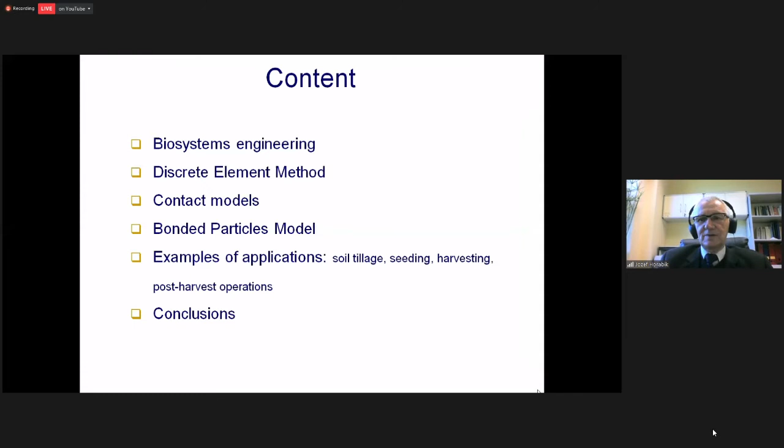Excuse me, Prof. Joseph. Yes. Are you still on the slide content? I'm on slide 16. Oh, I don't know. How about the other participants? Same with me on the slide. Prof. Joseph is still on the content. Please help. Yeah, still content. Okay. Maybe Prof. isn't in slideshow. Okay, I'm very sorry. So I will stop sharing this presentation and start from the beginning. Sorry again. Sorry, Prof. Thank you. Okay. Okay. What do you see right now? Slide number 16. Yes, Prof.

Okay. So on this slide, I'd like to show the effect of cohesion on particle behavior, presented by Tsuji et al. This slide indicates the strong impact of cohesion on soil particle behavior during the pushing process by a bulldozer blade.

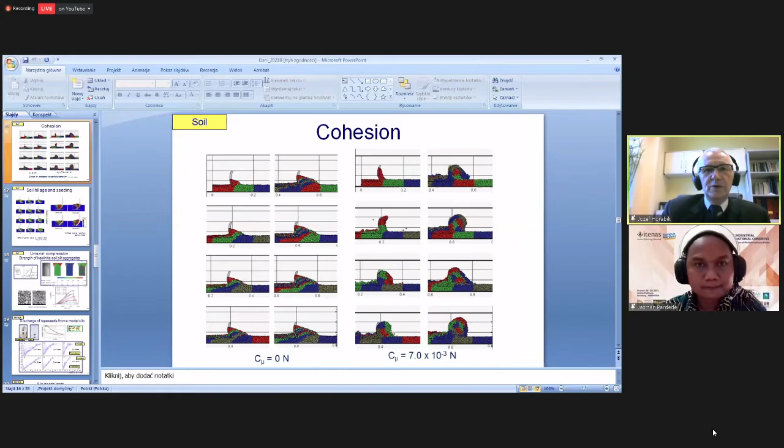Okay, I switch to slide number 17. Can you see slide number 17 right now? We saw slide 16. I'm sorry again. I don't know what is wrong with my computer. So, okay, I shifted to slide number 17 but I'm not sure. Do you see the proper slide or not?

But anyway, I'd like to shift to the problems of soil tillage. In case of soil tillage, the size of particles assumed in DEM simulation influences the quality of reproducing real processes. So smaller size, better approximation. We can see the images of simulation for small size particles and larger size particles. But smaller size means many more particles are needed for simulation. So it's very time consuming.

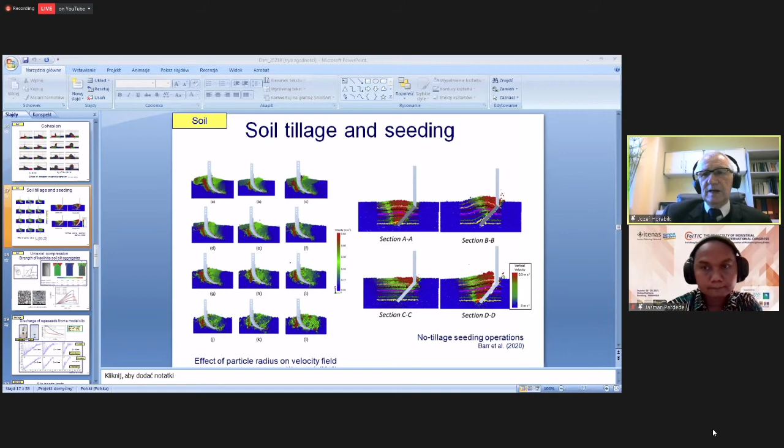Joseph, we now see only slide 17. Oh, I'm sorry. I don't know what is wrong with my presentation. I'm very sorry. So, well, I'm afraid that I cannot improve this. So, now is slide 28. 28. Yes. Okay, let me try again. Also slide 28. Okay. Okay.

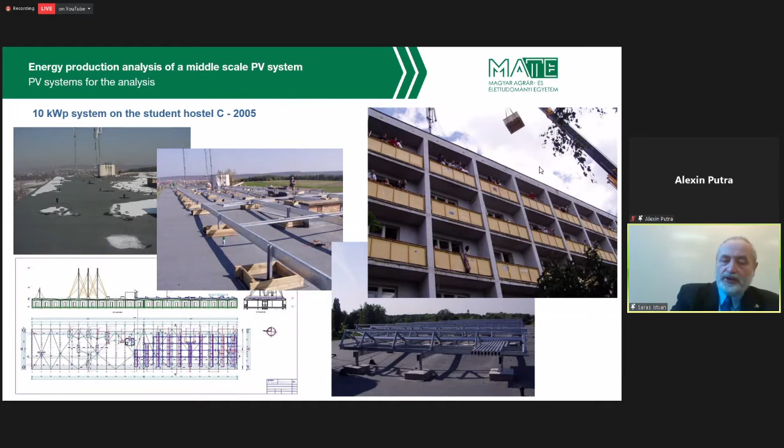Actually, what I mainly would like to show you is that we installed a 10 kilowatt peak photovoltaic system on the top of one of our student hostel buildings in 2005. Here are some pictures from the construction of the site, and here you can see some different data. At that time, this was the biggest Hungarian photovoltaic system. Of course, since then, the technology is improving very fast, as we could see from several presentations, how big the improvement is. We can see it in our university as well.

Now, altogether, we have 600 kilowatt peak installed on the roofs. And even in Hungary, we have some bigger constructions, mainly operated by professional companies. Even I have a small system in my house as well. So why was I choosing this old and relatively small system? Because we could collect a lot of consequences about its working, and perhaps this can be interesting regarding the aging, how the power is changing and what sort of factors we can see.

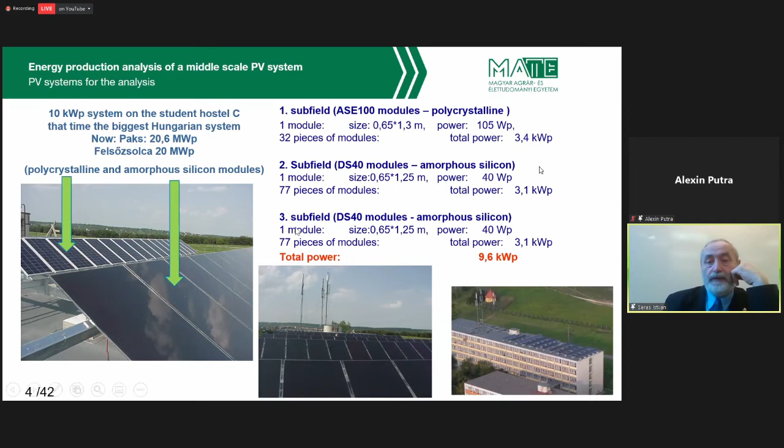First, let me show a few details about this system. Altogether, we have 150 square meters of modules. Most of them are Hungarian-made amorphous silicon Dunasolar modules, a company that is no longer working in Hungary, and a smaller fraction of the system is made of German polycrystalline modules. Here you can see some details about the size of the system, the numbers and the power.

I will give you a few words about the newer system, which is a semi-transparent module system in front of our Aula building. There the capacity is much less, 3.3 kilowatt peak. That is a demonstrational system, not really for energy production. Of course, we produce energy with it as well, but we wanted the students to meet this technology every day, because the other systems are on the rooftop, so they cannot meet with them.

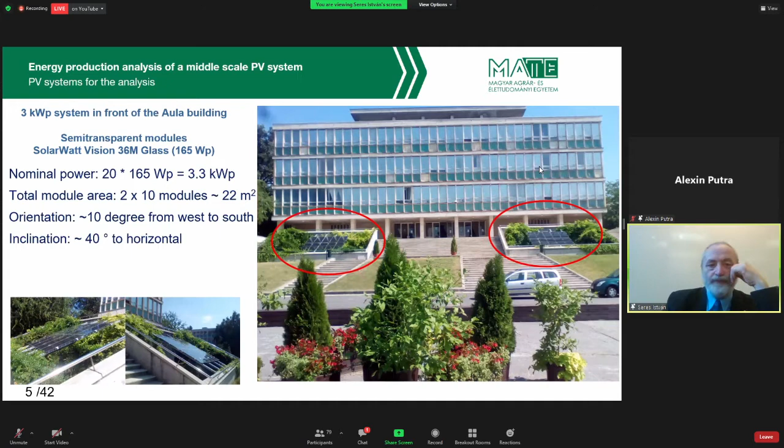And of course, in our research lab, we have different smaller modules and different testing sites to check the technology. Oh, sorry, I'm not sure whether you can see my whole figure or not. I hope so. So we did a lot of different measurements.

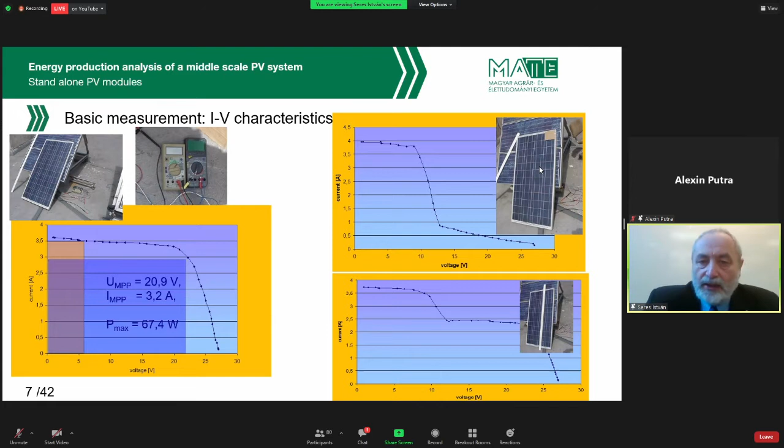Even in education, we have these measurements during the physics lectures, where the students have to measure the IV characteristics of the modules and calculate the maximum power that can be got from a given module, and we can even show them why it is important not to shade the modules, because if we shade just one cell, for example, then the module power comes down very drastically. So these figures are showing the effect of shading under different geometries. Of course, all these types of modules had just one bypass diode. In the newer ones, more diodes are installed, and it can decrease this effect.

On the other hand, we made a comparison of the different systems, different technologies as well. For example, as I showed you, in this system we have polycrystalline and amorph silicon modules as well. Of course, the direct comparison of the energy production is not the best because they have different nominal power.

So what we did, we defined a so-called specific power, which is the actual power of the system divided by the nominal. So we watched with what power 1 kilowatt peak of module capacity is working, or how much energy is produced by 1 kilowatt peak of modules. So the energy production was divided by the nominal power of the system. In this way, we got specific power and specific energy production, and we checked the rate of these productions.

That means that the energy of 1 kilowatt peak of polycrystalline was divided by the energy production of 1 kilowatt peak of amorph silicon. And what we could see, this is data of long years, is that there is a seasonal effect in this function.

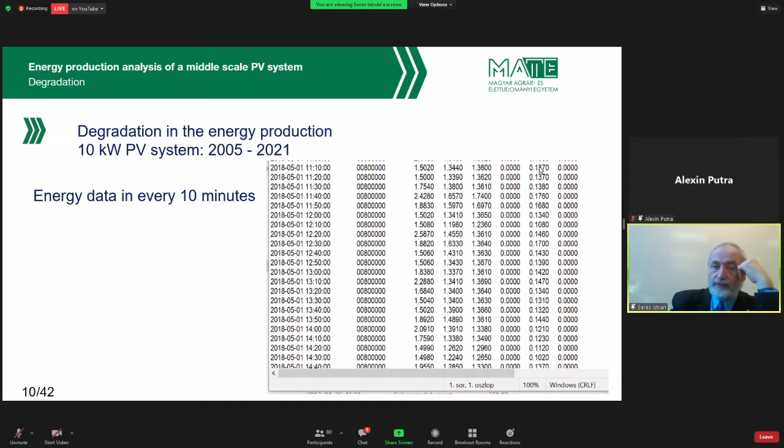So from this data, we can calculate a 10 minute average power for each subsystem. Of course, we try to check how much degradation there is in the system. This degradation is normal, I think.

If you buy a photovoltaic system, for example, I installed one, as I mentioned, on the roof of our house last year, and the warranty was that these modules will have 85% of their initial capacity or nominal power after 20 years. How can we check it? Okay, we checked it in our system.

So as you see, we did some measurements and made some yearly analysis of the data, how much energy was produced from year to year. At the beginning, it was very regular. I mean, at the end of every year, I was coming here. In later times, it was not so regular, but it was working continuously.

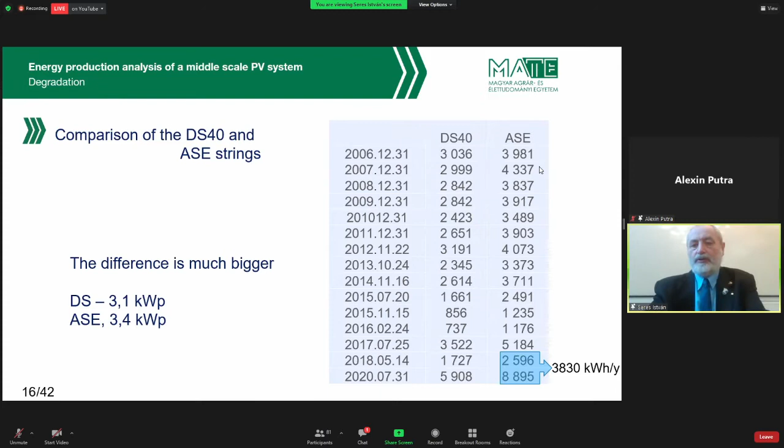I'll just show it in a different slide. In this slide, you can see what is the rate of the polycrystalline technology in the total energy production. What we can see is that it is going from about 40% to 43-point-something percent.

So our conclusion was that the amorphous silicon technology degraded more than the other modules.

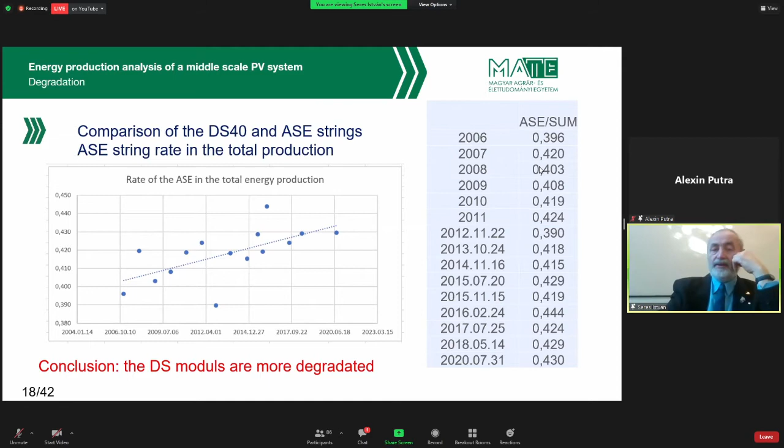Yeah, of course, each of them was degraded in a given scale. What can be the reason for it? So we are checking regularly the system, and these are the ASE, the polycrystalline modules. And on that way, when we checked the system, there was no sign of degradation. So visually, we could see nothing.

Of course, what you cannot see by eye is the effect of the UV radiation. Ultraviolet radiation is damaging the material somehow, but you cannot see it. So I think the polycrystalline modules are okay. What we could see is that during construction, they did not use rust-free screws. That was the only problem we should repair, but it does not have an effect on the working of the system.

After that, we were checking the amorphous silicon technology as well. We could not see colorization. The junction seems to be okay. There are no hotspots on the system. But what we could see is that, I think because of the production technology, in the bottom and the top of the modules, some air was going in. I think the insulation material is not the best. So between the module surface and the glass cover, there are some air bubbles.

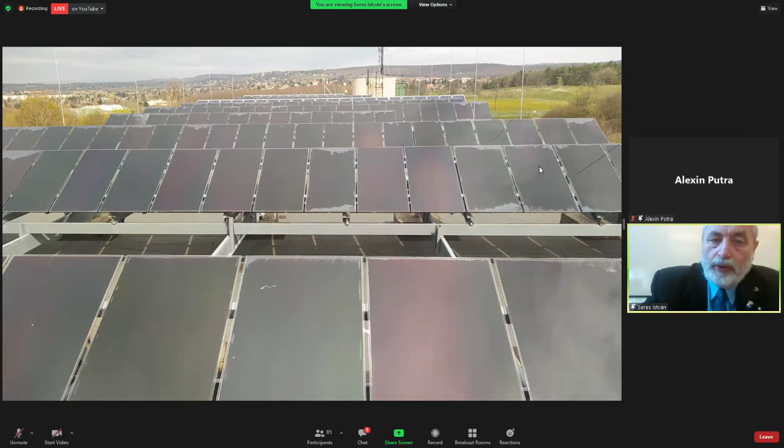In some cases we could see this effect almost in all rows, and in other cases it was a very partial effect. This is a photo of the system from before, and you can see that in the middle of the field, very few modules are affected, mainly in the sides, generally the sides of the system, and in the back part of the system. I made an analysis. This is the last row - in the last row, almost every module is affected. But if I go further, just the side modules are affected.

We were thinking about these numbers - this is the south direction, and this is the north. In the rows, the north part is affected in high range, and the rows in the south side of the field are affected less. And even in these rows, mainly the side modules, which are in the edge of the rows, are affected. So we were talking about what can be the reason for this, and we concluded that probably...

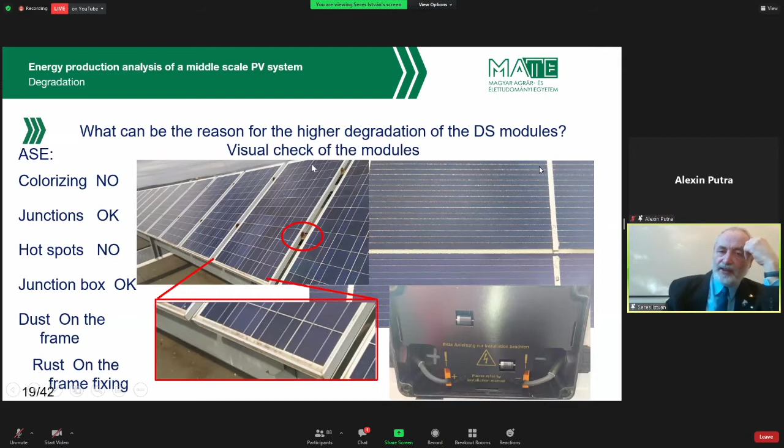Probably the wind direction in Hungary, and in Gödöllő as well - the main wind direction is from the north - and as the wind is coming, in some cases we have quite strong wind. These Dunasolar modules, the fixation point is somewhere here. And of course, if the wind is coming and some turbulence develops, then it is moving continuously, I think, the sides of the modules. This problem does not come for the polycrystalline, because the polycrystalline has a frame, and this frame does not let the module itself move, but it's not the case for the amorphous silicon.

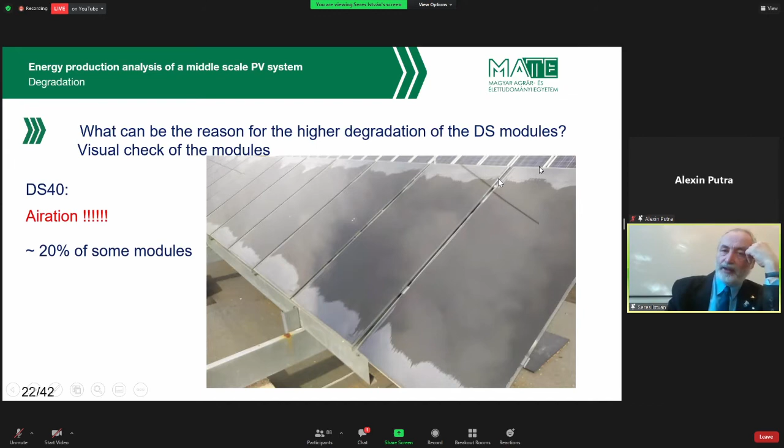So the fixation points - there are 4 to 6 fixation points somewhere here. You can see the holder rod behind, and this is the glass. If the wind is coming, it can move a little bit slightly. Of course, you cannot see it by eye, but I think it can move, and that is the reason why the side modules and the backside modules, from where the wind is coming, are mainly affected by this problem. So we predicted that this causes about 4% of energy loss continuously at this moment. Perhaps we should try to re-insulate some modules to see if it stops, or whether we can stop it or not - that is the next question.

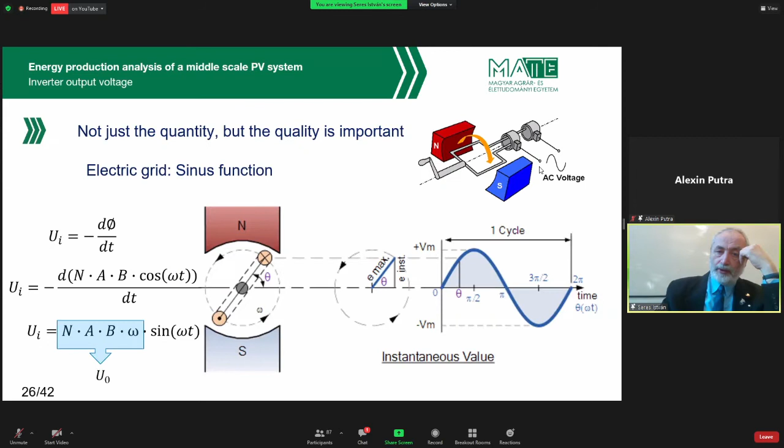We made with students a very simple measurement circuit. To measure this sine function is not so easy because it is changing very fast. You cannot check it with a multimeter.

If you measure with an oscilloscope, you can visualize it very easily, and even with newer oscilloscopes you can save the data as well. But these types of oscilloscopes are not so cheap.

So with students, we were using high sample rate voltage measurement with data loggers. But the problem is that these data loggers can generally accept a maximum of 5 or 10 volts as input voltage.

So we were setting up a voltage divider with two resistances connected in series. From physics, you know that in resistances, the voltages are proportional to the resistances in case of a serial connection.

We took this unit, connecting the grid voltage to the serial connection of these two resistances, and we measured just the voltage of R2. Using 46 kilo-ohm and 0.46 kilo-ohm, high resistances had to be used to avoid high currents, giving roughly a 1 to 100 ratio.

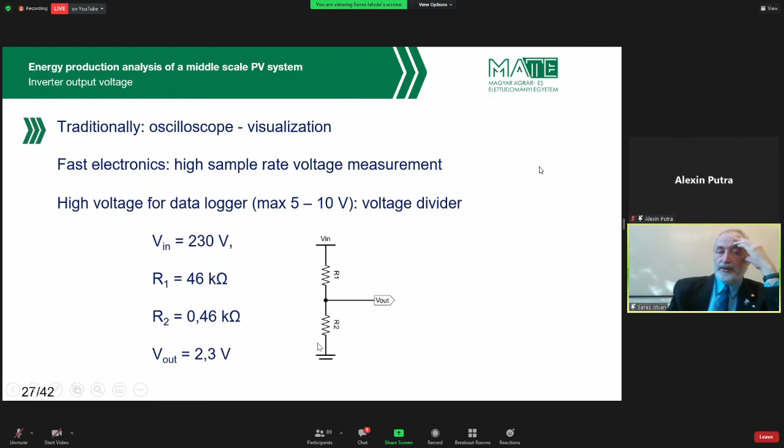Then the power rate or the voltage rate is 1 to 100 as well. In this way, we could measure the voltage as a time function.

We were using two types of units for this purpose. This is a National Instruments USB, a very simple one which can measure at 48 kilosamples per second. And we were using a National Instruments MyDAQ unit, an educational unit with a sampling frequency of 400,000 samples per second.

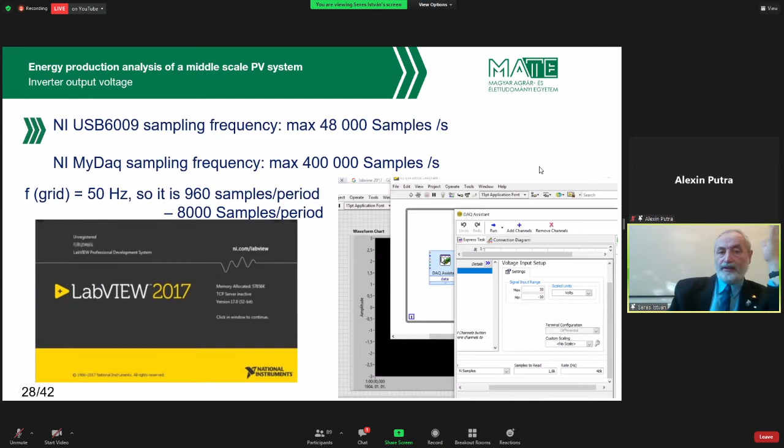With these units, we used the LabVIEW software for collecting the data, and with this we could measure the time series of the voltage. This is the measurement of the voltage of the grid in the physics lab.

With this setup, we could check the shape of the voltage function for different inverters producing solar energy. For example, this is a very simple inverter.

We have a so-called solar suitcase. In this solar suitcase, we installed a few small PV modules, about 5 watts altogether, along with a charger and an inverter. This unit is borrowed by the scouts, and when they go to camp, they can charge their phones and operate an LED for lighting and so on.

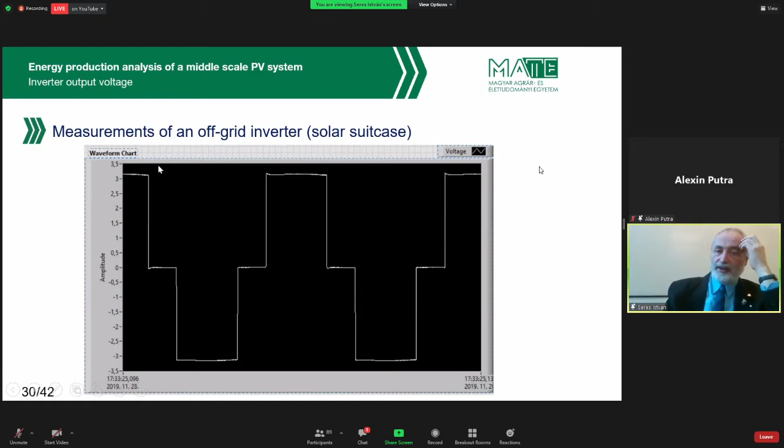We checked the simple inverters. These simple inverters are generally not sinusoidal, but normal units, chargers and lamps, are designed to work with them.

But the problem is, I just need to check how much time I have. Perhaps I can stop for a while now, because I would like to show you something. Theoretically...

This is an audio software. With this audio software, I would like to demonstrate for you what we measured. Actually, oh, I made a mistake. No problem, I can open it again. So I'll just play a sound for you. I hope you will hear it.

Could you give back any feedback? Could you hear the sound?

No, no, no. We cannot hear. Oh,

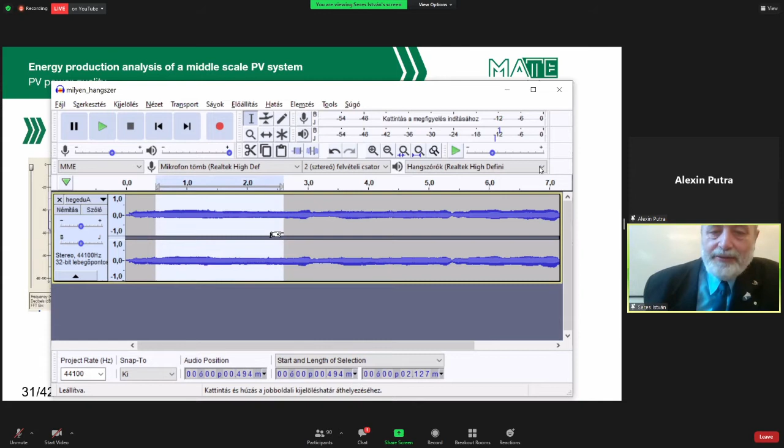it's really a shame. Okay, then this demonstration will just work by picture. Sorry for it. The problem is that I cannot get the sound. So this is a sound of a violin. I'm really sorry that I could not demonstrate it, but I don't know how I should set my computer to be able to hear the sound of the violin as well.

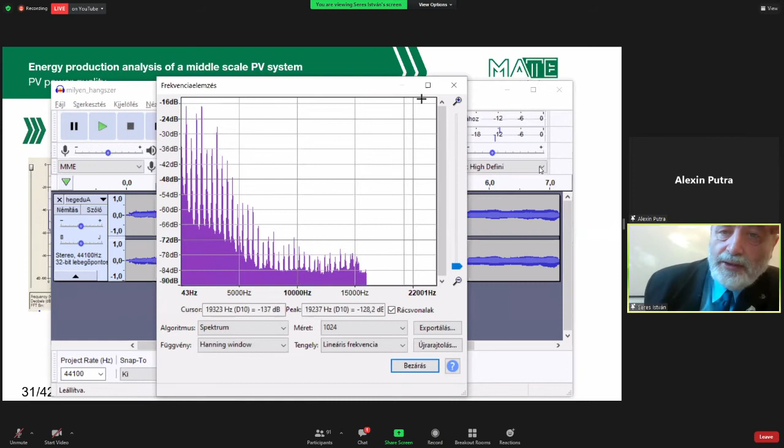It was recorded and we can analyze it. Because the main question: if we hear a violin or a piano, we can decide which instrument's sound we hear, although they are playing theoretically the same sound. For example, this sound A, 440 hertz. With this software, I can show you the spectra. The spectra shows what sort of frequencies were used. This is the spectra of the violin.

I have 4 children, so they play different instruments.

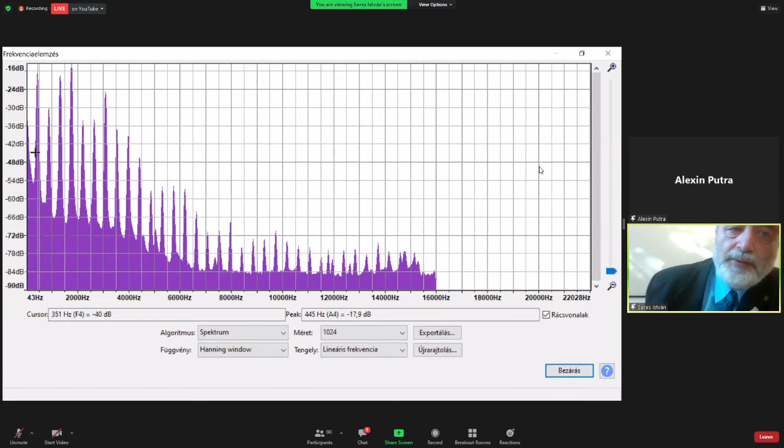At this moment, we can see that this was about 440 hertz. This is the peak, but we have 880 and we have 1320 and so on. So when we hear a sound, we hear the basic frequency, and we have the double, 3 times bigger, 4 times bigger, and so on frequencies as well.

If I open another instrument, this other instrument is a piano. Surely you would be able to hear it, but at this moment perhaps it's useless to play. And if I check the spectra, we can see a very different range, but the same basic frequency, 440, and we have so-called harmonics. So harmonics are generated as well when we hear a sound.

And as the rates of the harmonics are different, we can distinguish which was the piano and which was the violin. So in this way, we can recognize what sort of instrument was playing. Okay, this was about the sound. Now I'm coming back to my presentation.

No, I don't want to say. So this is a spectra of the piano, and this is the spectra of a violin with a different software. So what is the difference? The difference is the power rate of the harmonics. But these harmonics exist for any system when we are generating periodic functions.

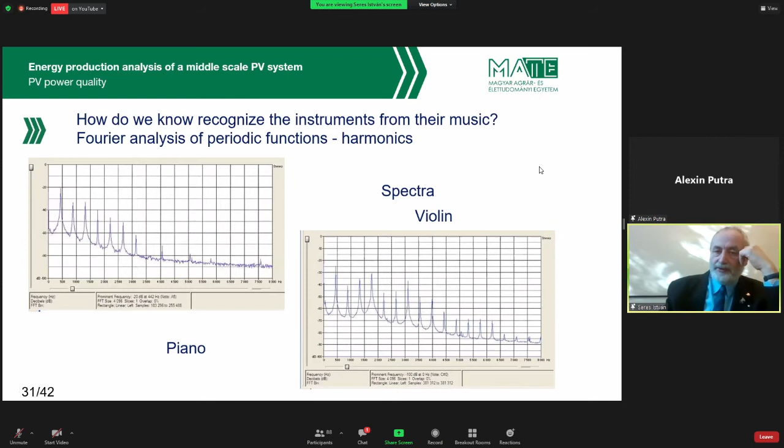Perhaps some of you were learning mathematics and have learned Fourier analysis theory. Fourier analysis says that any periodic function can be reproduced by a special sum of sine and cosine functions. This is the so-called Fourier series. And we even have the rule for how the multipliers of the sine and cosine functions have to be calculated.

And what we see is that in this case, I have to multiply x by whole numbers. If x is a given frequency, then I have the multiples of x. So I have the harmonics. In this way, we can set up the spectra of any periodic function. In some cases, we have even functions. We call a function even when it is symmetrical to the y-axis, and odd when it is symmetrical to the origin. The sine function is odd and cosine is even.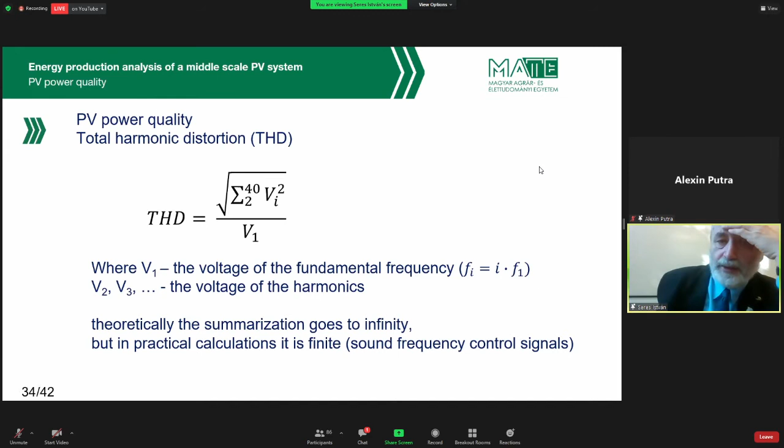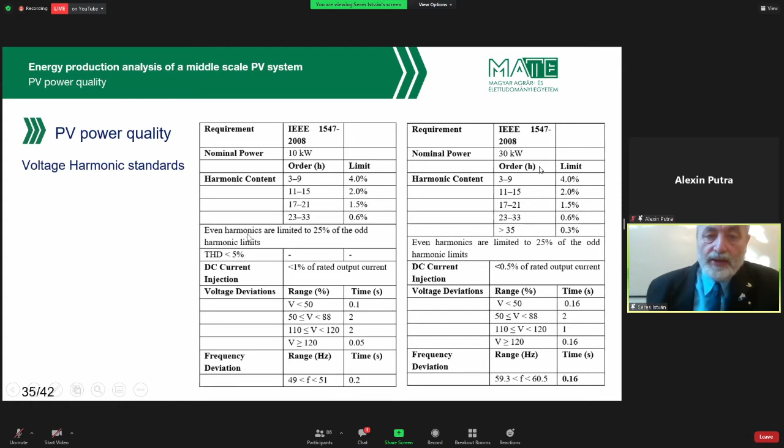Theoretically, the summation goes to infinity, but the amplitudes of these voltage functions generally decrease exponentially, so after a while we can eliminate them. A few words about this analysis. First of all, there are standards, European and American standards, for how much harmonic content there can be in the lower orders and in the higher orders. And as you see, the odd components and the even components are different. I mean the limits.

If we check the different standards, generally they say that the total harmonic distortion has to be below 5%. Why? It's not interesting if it's odd or even, because this is the basic frequency. This is the first harmonic. If you check the first harmonic, the frequency is double, so the wavelength is half of the original basic fundamental function.

But in this case, the harmonic gives a positive and a negative addition in one part, so they more or less equalize each other. But if we check the second harmonic, in this 1/2 period, I have 2 positive and 1 negative range. And on the other side, I have 2 negative and 1 positive range. That is the reason why these harmonics are more strictly reduced than the other ones.

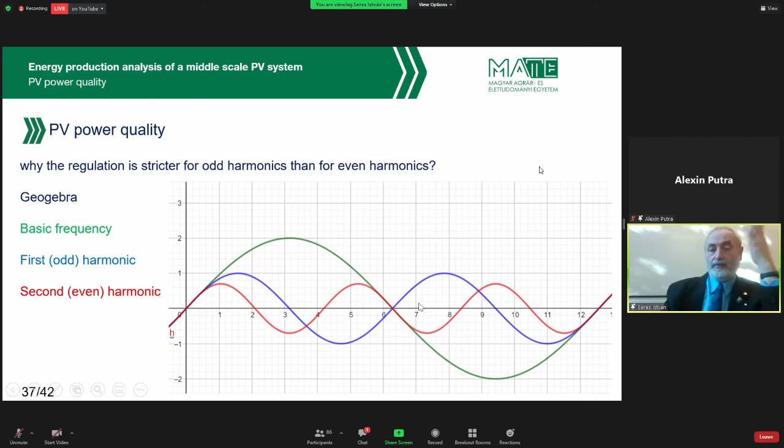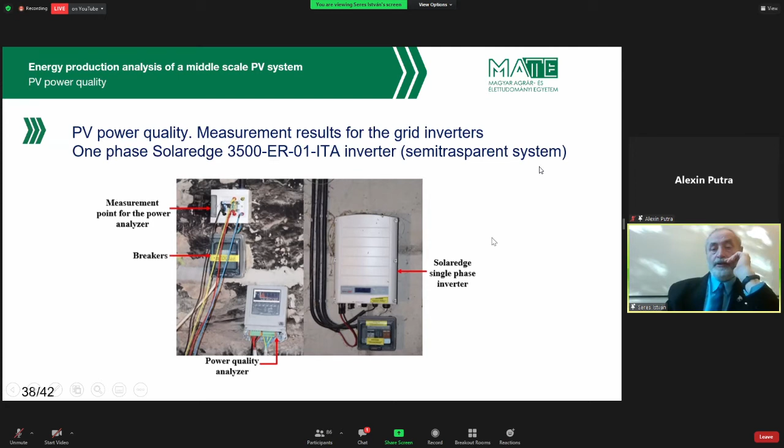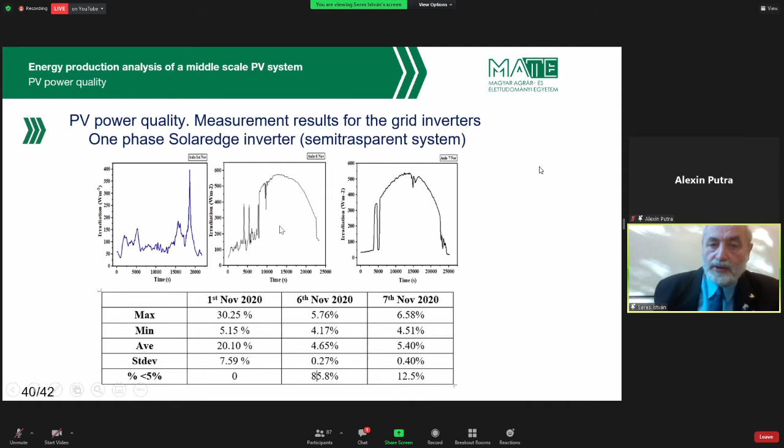Yeah, this is the inverter and the measuring of the semitransparent system. We did a lot of different measurements, and here you can see the harmonic distribution and the total harmonic distortion of the system for the voltage and for the current. What we could recognize is that under bad radiation conditions, the total harmonic distortion was higher, and under good conditions, the total harmonic distortion was in the limit. And we could measure the same for the big 10 kilowatt peak system as well.

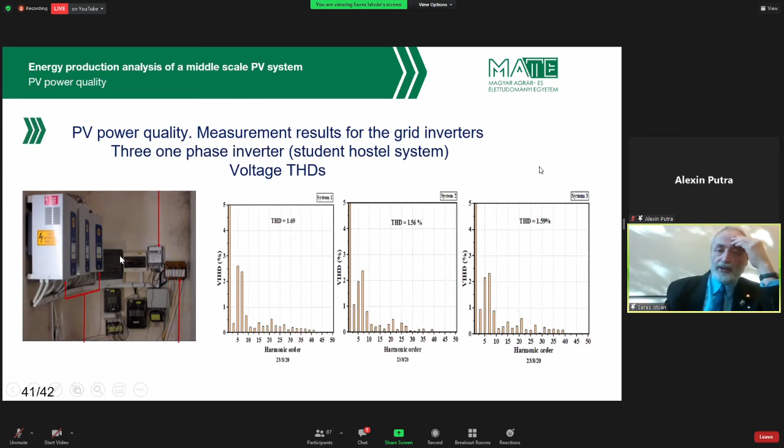So we could say that the total harmonic distortion is below the expectations when the sun is shining well, but it can go wrong for our inverters. Of course, it's depending on the inverters under bad conditions. But if the condition is not so good, the radiation is changing, or the radiation is very low, then of course we feed a very small amount of energy to the grid, so we cannot harm the grid too much.

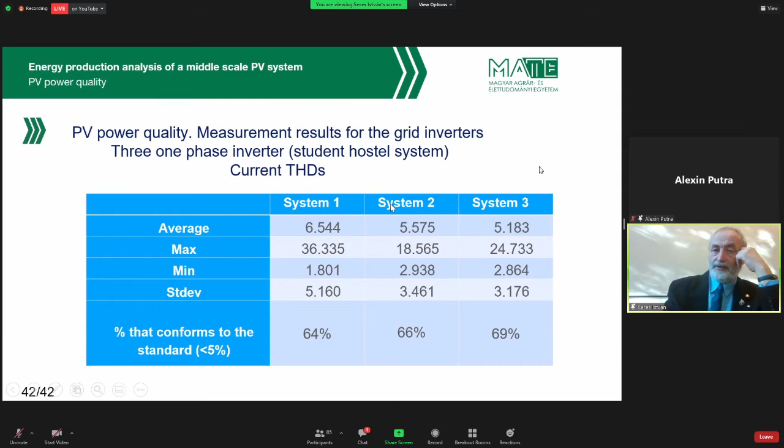But under good conditions, when the energy surplus is big, the total harmonic distortion is okay. That means that our systems do not harm the grid. So the grid operators don't have to be worried about it.

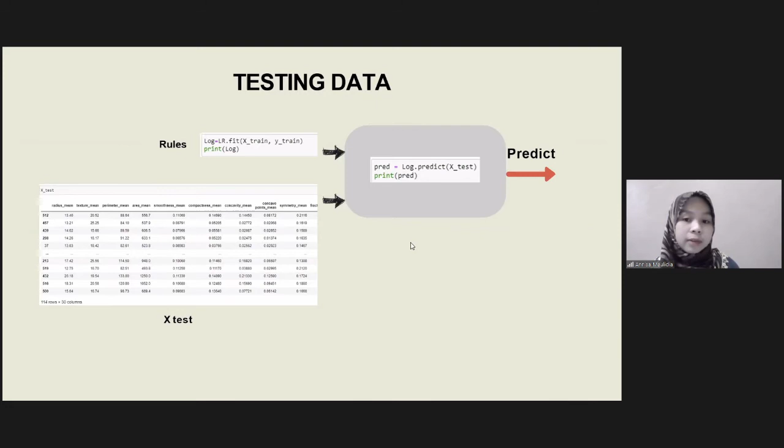And then it is processed with the function, and the output of the testing phase is prediction or classification of the type of cancer, which is evaluated through 3 methods: cross-validation, confusion matrix, and ROC-AUC. And this is the result of this paper. The slide shows the accuracy result in the training process and the accuracy resulting from the cross-validation process.

By using the same data, it can be analyzed that the training process is overfitting, one sign of which is the accuracy of the training data being greater than the accuracy of the cross-validation process. We can see that training data accuracy is 99% and cross-validation accuracy is 98%.

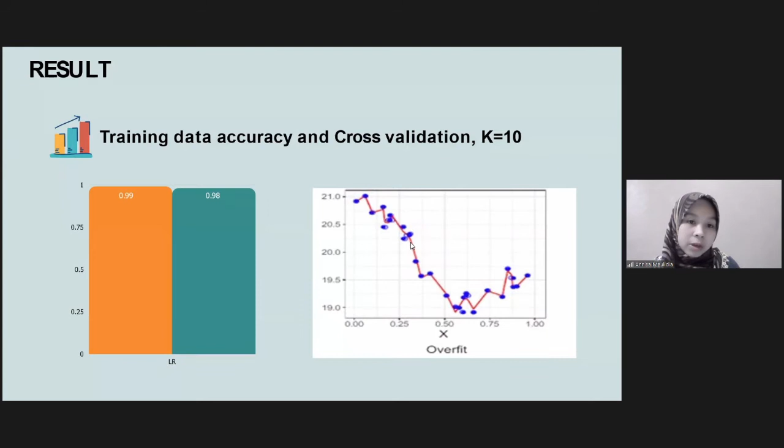And the next parameter is ROC-AUC. The value of ROC-AUC is 0.963, which is included in the excellent category, where the algorithm can predict 1 and 0 very well.

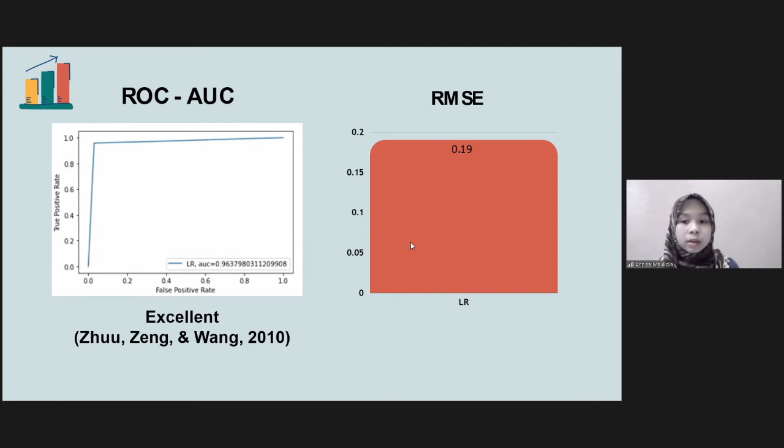And this is the summary of the overall parameter values in this study. Based on the research that has been done, logistic regression has a very good ability to predict the type of breast cancer, which is indicated by the test data accuracy value of 96.5%, and can generalize to new data formation by 98%.

In addition, the ability of logistic regression in providing information according to the requested data, precision, is also very good, about 95.7%, with the ability to find information, or recall, of 95.6%, which makes logistic regression able to separate predictive data as 1 and 0 by 96.3%, and with an error value of 0.19.

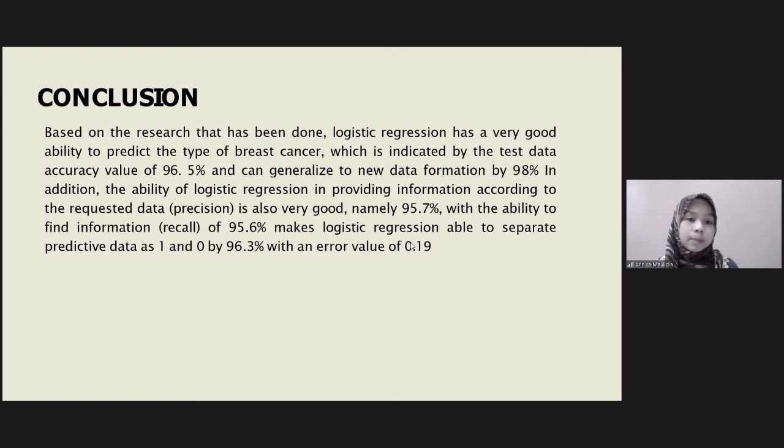And these are several references that I use in this paper. That's all for me. Thank you.

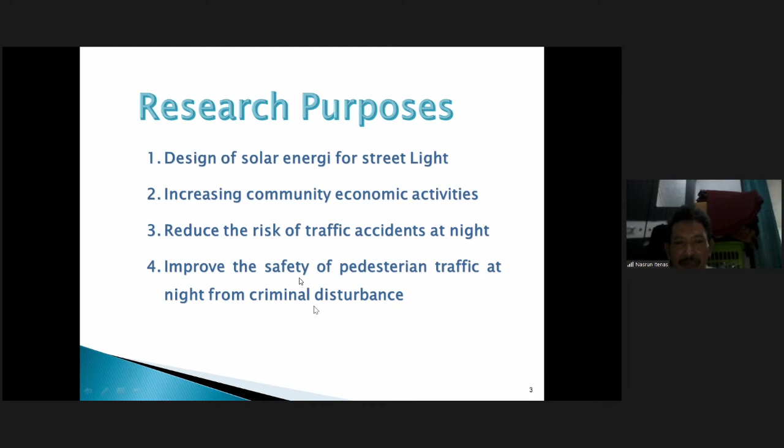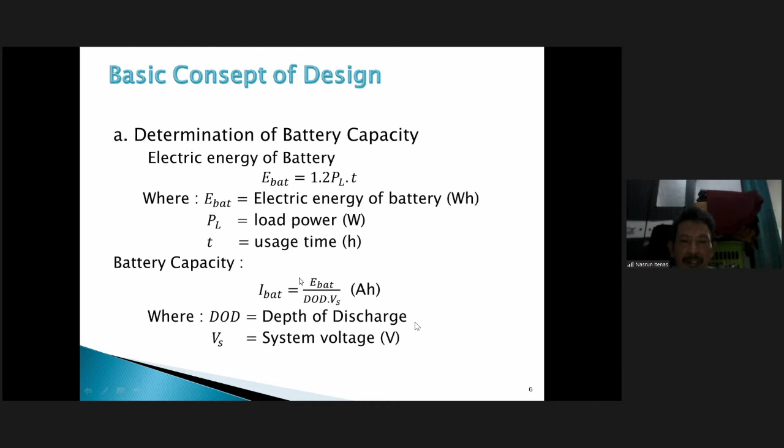To determine the panel capacity, we have the sun index from Mataram, Indonesia, Solar energy and surface meteorology, from the internet, climate and environment data from NASA. From the index we have the highest index, 6.23. The capacity of the solar panel we can calculate from the battery and insolation. This is the sun index.

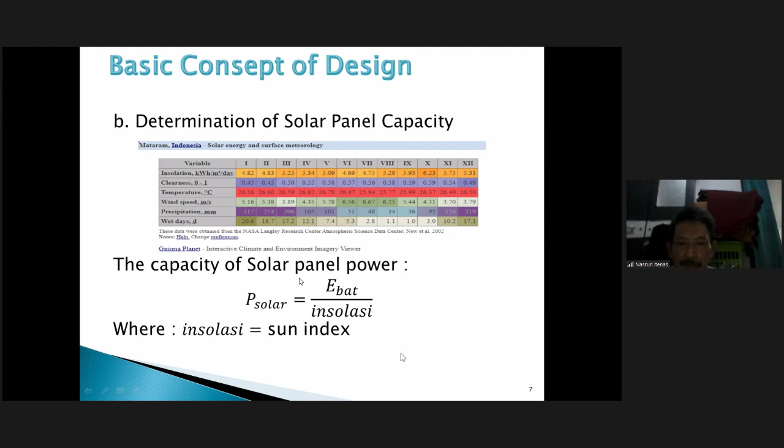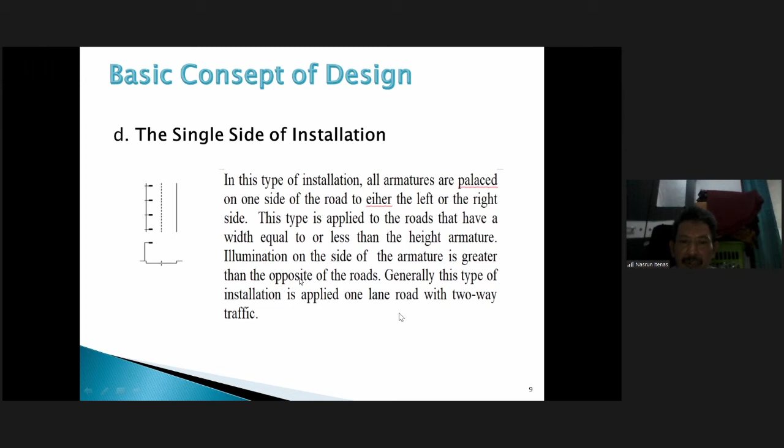The staggered installation, or zigzag. In the staggered installation, the armature is positioned on both sides, with the poles parallel, left side and right side. This type is applied where the width of the road is 1 to 1.5 times the height of the armature.

Opposite installation. In this type of installation, the armatures are located opposite one another and parallel to each other. Generally, it is applied where the width is greater than 1.5 times its armature height. Opposite installation is applied for two-way traffic on one road.

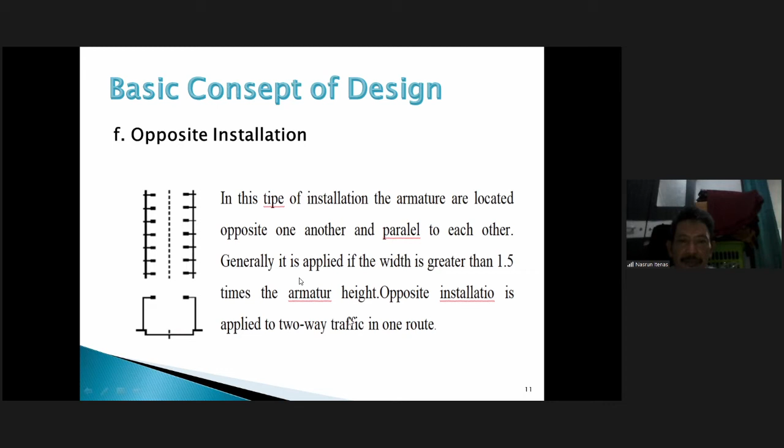The twin central installation is the central installation. The armature is applied on the median of the road. However, the installation can also be considered a single side installation for each road. Generally this installation is applied for dual carriageway.

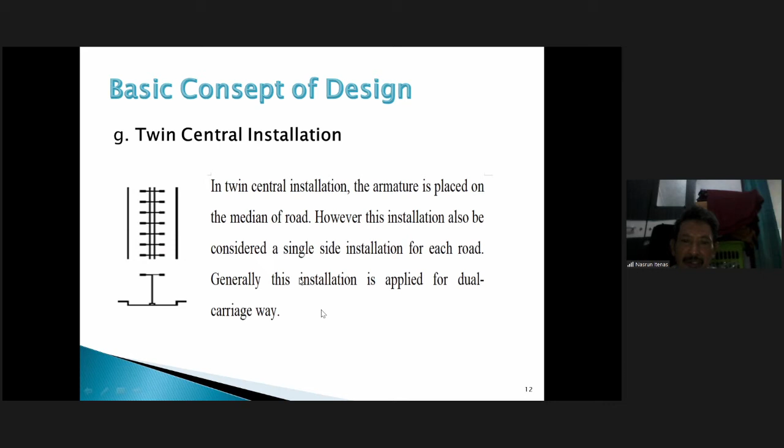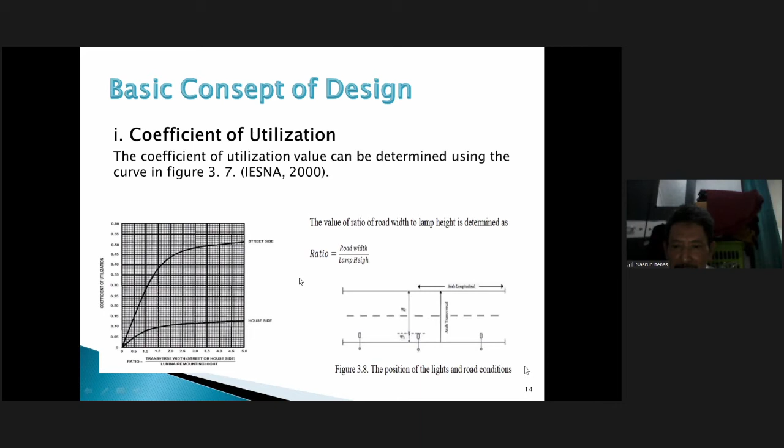The distance of the house side is set with W1 as OH, where OH is the overhang. The distance of the street side is W2 equals W minus OH. W1 is the distance of the house side in meters, and W the width of the road in meters.

The house side ratio is W1 per H, where W1 is the distance of the house side and H the lamp height. The street side ratio is W2 per H, where W2 is the distance of the street side and H the lamp height.

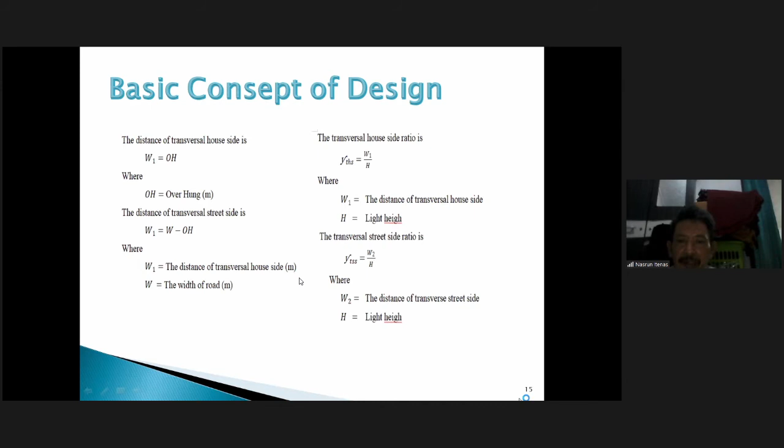After obtaining the house side ratio, refer to the utilization coefficient of house side curve. We can determine the value of the coefficient of utilization of house side, CUHS, and after obtaining the street side ratio, refer to the utilization coefficient of street side curve. You can determine the value of the coefficient of utilization of street side, CUSS.

Coefficient of utilization is defined as CU equal USS plus UHS, street side and house side, where USS is the utilization coefficient of street side and UHS the utilization coefficient of house side.

The space between two poles: the calculation is S equals F times CU times MF over W times E, where S is the space between two poles, F the lamp flux in lumen, CU the coefficient of utilization, MF the maintenance factor, W the width of the road, and E the illumination. The number of poles needed for a road is given by N equals L over S plus 1, where N is the number of poles, L the road length, and S the space between two poles.

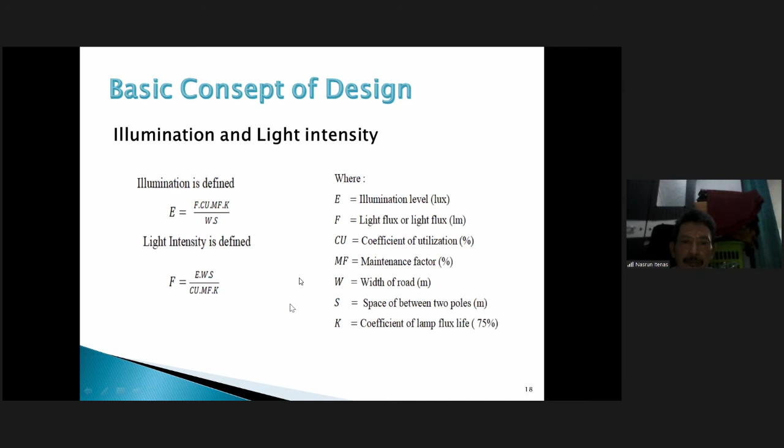The data, width of road, data analysis. Width of road W is 4 meters. The height of luminaire is 7 meters. Analysis: arrangement of public street lighting. The average road width is 4 and the height is 7 meters. The width of the road is lower than the height of the luminaire, so we chose single side for the public street. This was wrong, it is 4 meters. Sorry.

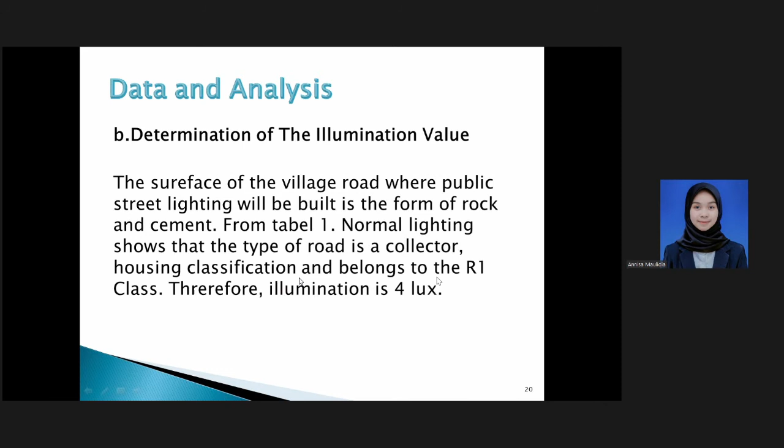Determine the value. The surface of the road where public street lighting will be built is of cement. From the table of normal lighting, the type of road is collector, housing, and belongs to the R1 class. Therefore, the illumination is as follows.

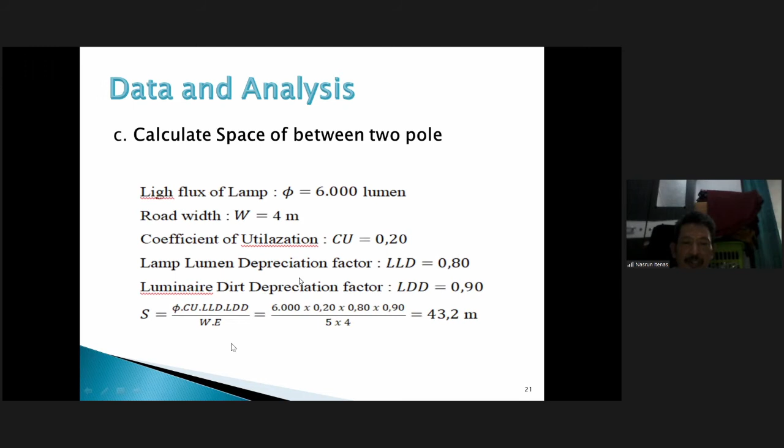Calculation of space between two poles. We determine from the lamp, the lamp flux approximately 6,000 lumen, road width W 4 meters, coefficient of utilization CU 0.2, lamp lumen depreciation 0.8 LLD, and luminaire dirt depreciation factor 0.9. We have the space between two poles as 43.2 meters. We choose a space of 50 meters.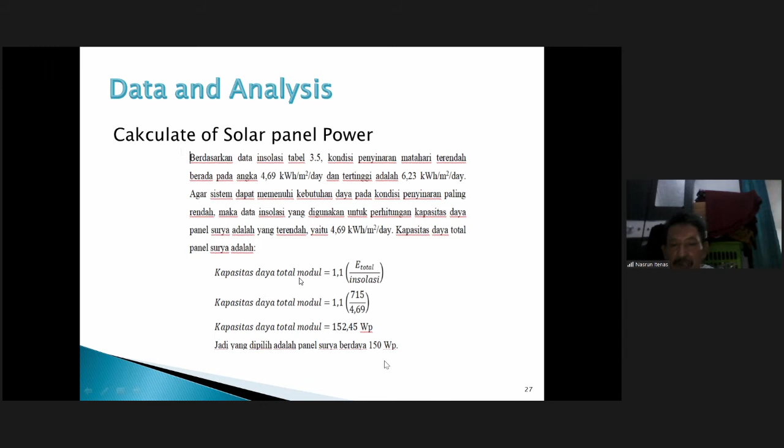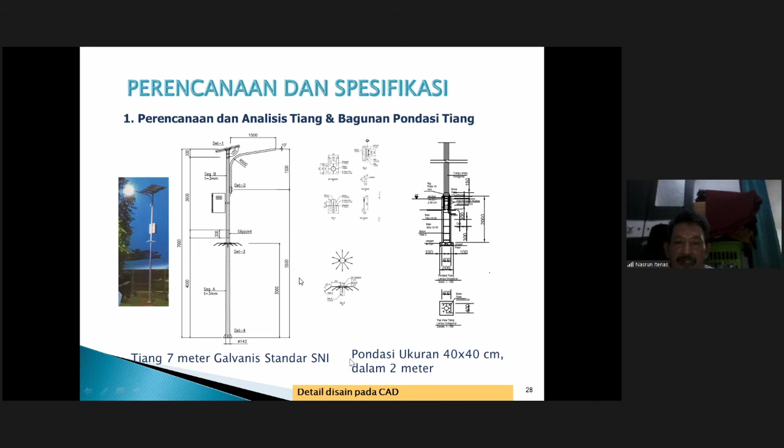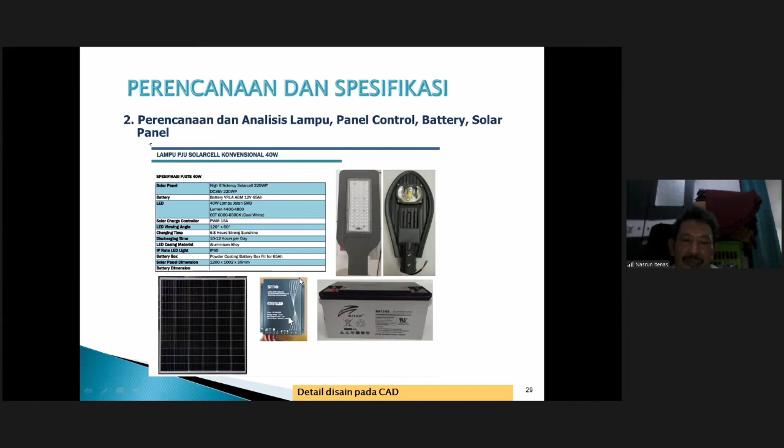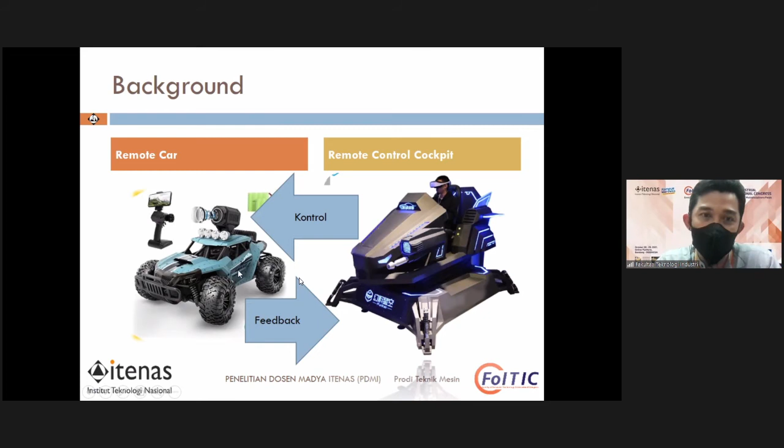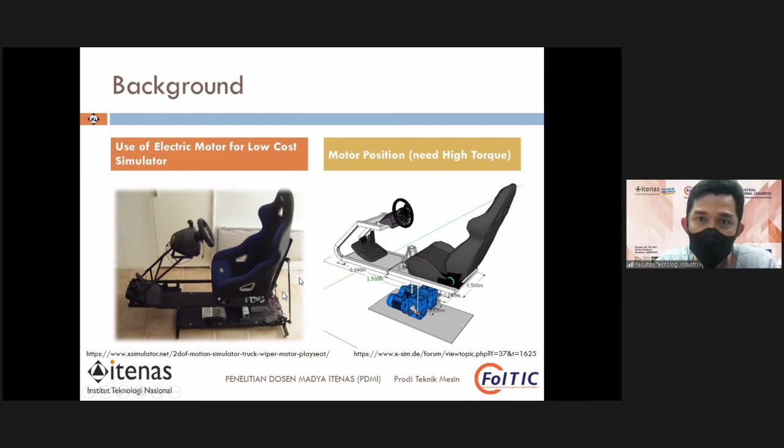So the objective is how to make a frame simulator that can move like the motion of the remote vehicle. I chose pitch and roll motion control to give feedback to the frame simulator.

The other objective is how to change the motor position. I hope it can reduce energy or use a motor with low torque, reducing the energy. This is the position of the motor.

I tried to put it in the front, so I hope the mass of the body can only be several percent of the human body, maybe just legs and feet here. So the motors can use low torque but still give motion.

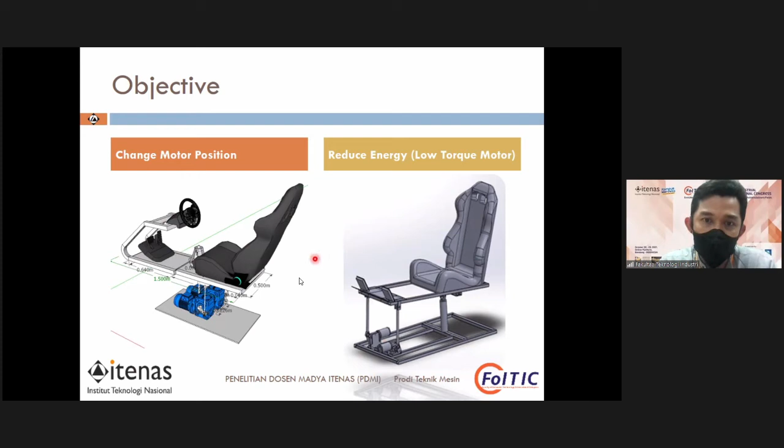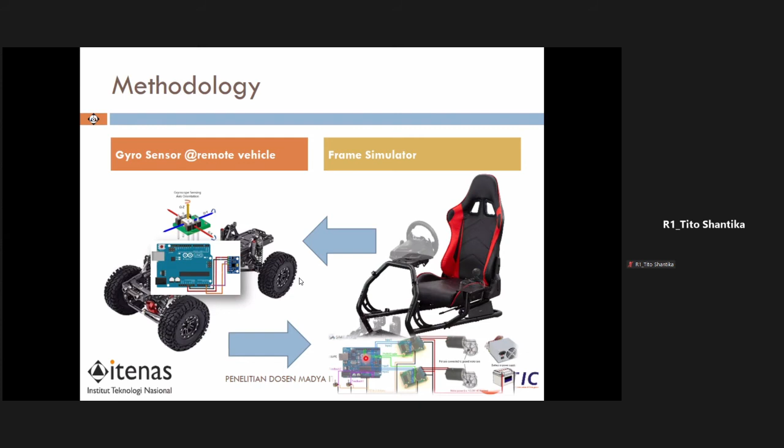The methodology is for the frame simulator. We try to give it several components for motion. We choose the Arduino and the motor driver, the motor, then an accumulator to power the system.

The steering or remote still controls the vehicle, but we add a gyro sensor in the remote vehicle to give information to the frame about how the RC car is moving, in roll and pitch.

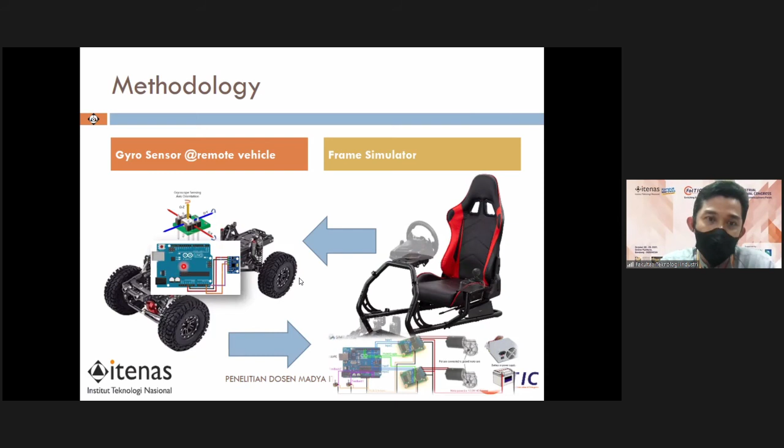In another scheme, in the frame we have to know the motion of the frame. So I choose the potentiometer to know the position of the shaft of the motors, which is connected to how the frame is moved in rolling or pitch motion, and connected to the linkage.

And in the RC car, we only use the gyro sensor to know the movement, the motion in roll and pitch.

In this scheme, one is in the remote vehicle, but in my research right now I only use how the gyro can send commands to the frame simulator system. So maybe for the remote vehicle, I will try that in the next research.

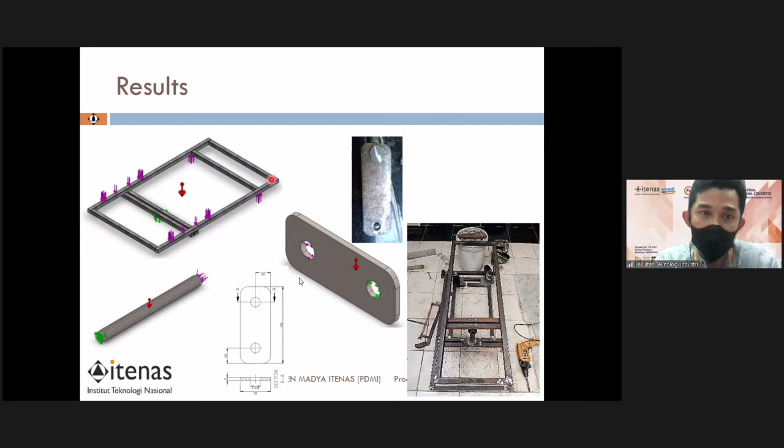And the result: after we design the frame, we try to make the frame and analyze it in software using SolidWorks. After we design it, we try to realize the frame. So it's only the frame so far.

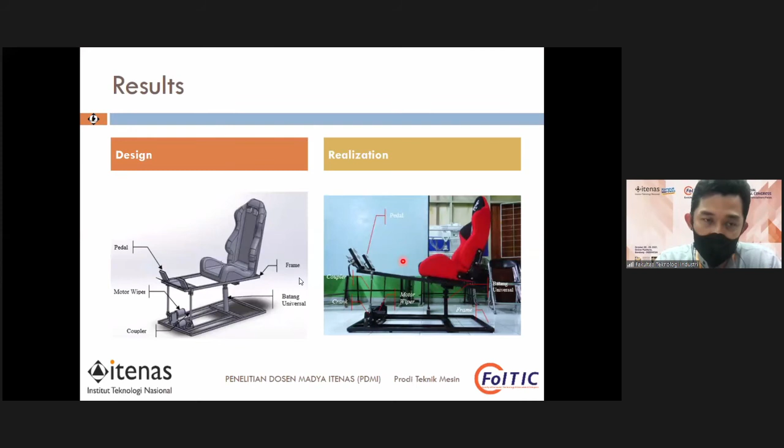In other research, next step, we try to complete it with a steering wheel or joystick, if we want to make this for a flight simulator or car driving simulator.

And the conclusion is the frame dimension is about 600 millimeters by 420 millimeters wide, and 100... the weight is 35 kilograms, assuming static load on the frame, with people sitting in the chair plus the chair.

And others, 150 kilograms. In the SolidWorks analysis, the frame safety factor is 1.75 with maximum stress 116. We checked the safety of the coupler and the safety factor of the crank, and concluded that the structure is still within safety limits.

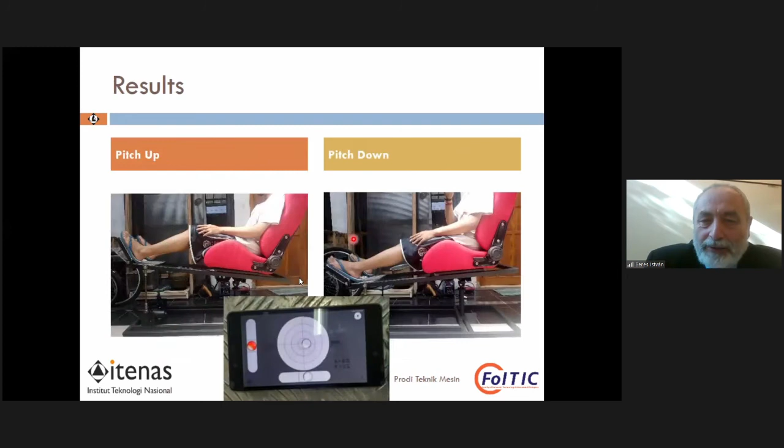As I understand, perhaps you are planning to connect it to a real car. Maybe in next research, Professor.